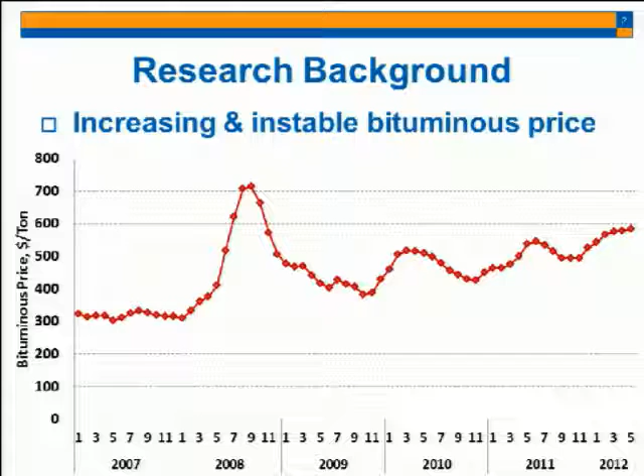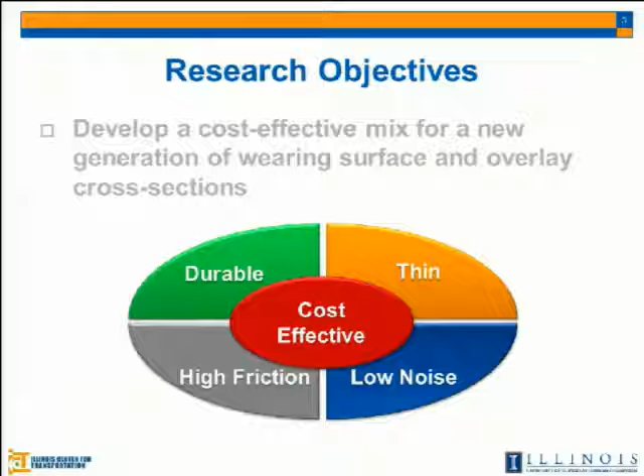For the last several years, or this decade, oil prices have kept increasing, or at least have been unstable. So IDOT developed a cost-effective asphalt mixture for the wearing surface. But even though we developed this kind of cost-effective asphalt mixture, it should still promise similar or better performance than the current mixture used in the wearing surface. So it should be durable, thin, low noise, and high friction. And the most important thing is it should be cost effective.

There are 2 ways to reduce the cost. The first one is to reduce the thickness—in that case, we can save money by reducing the amount of materials. Another one is to replace the materials with less expensive aggregate or asphalt binder. So in this project, we tried to develop 4 new mixtures using these 2 approaches.

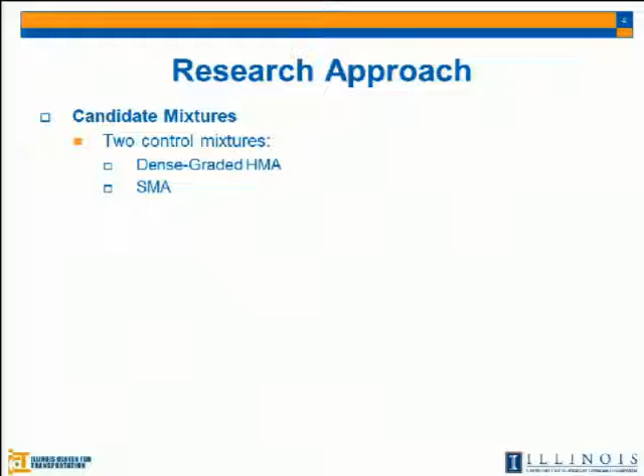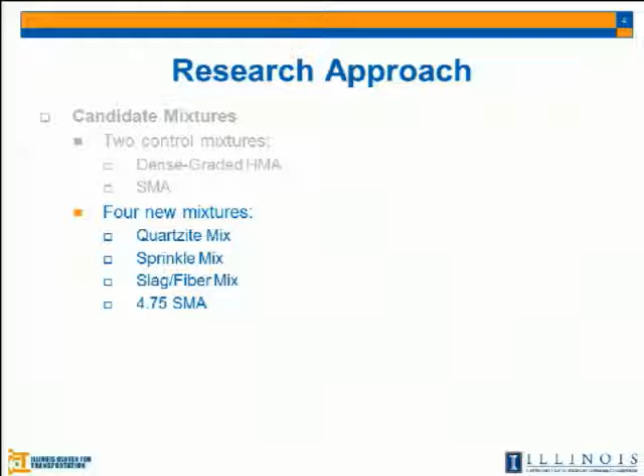To compare with the new mixtures, we selected 2 control mixtures currently used in Illinois as wearing surface mixtures: one is 9.5 dense grade HMA, and the other is 12.5 SMA mixture. In the lab, for cost-effective asphalt materials, we developed 4 new mixtures: the first is quartzite mix, then sprinkle mix, slag fiber mix, and 4.75 SMA. I'll talk more in detail about it later.

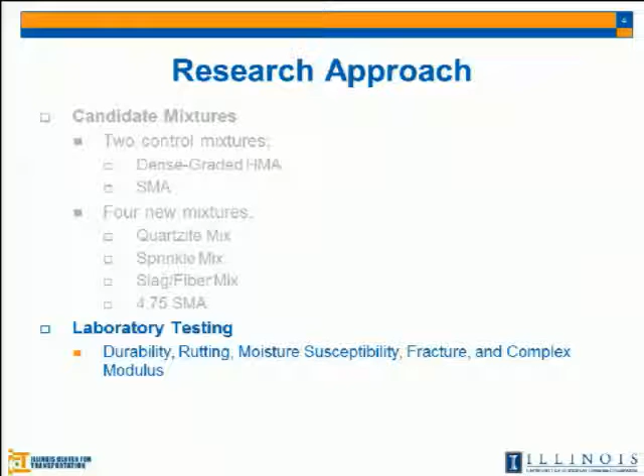So now we have 6 mixtures, including the 2 control mixtures and 4 new mixtures. For these 6 mixtures, we conducted laboratory testing and also field testing, to see the engineering benefit and cost. We did an engineering benefit analysis, or cost analysis, of these mixtures.

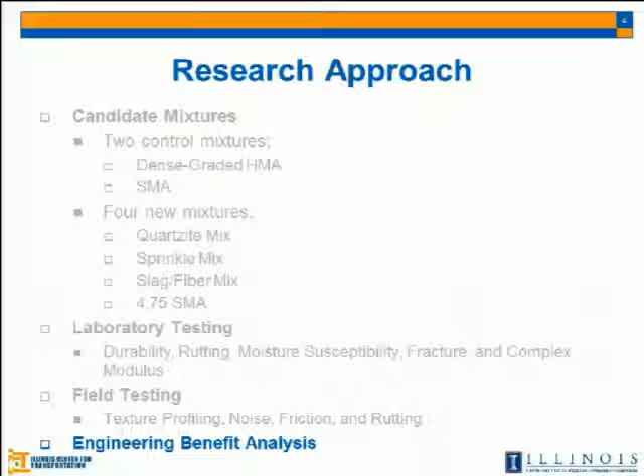Laboratory experimental program: we tried to use locally available aggregate as much as possible, because it saves money—we can reduce transportation fees or costs, and using the most popular aggregate in Illinois is better than importing aggregate from other states. In Illinois, limestone, dolomite, and natural sand are the most popular aggregates. But limestone is not allowed for asphalt surface layers because it's not strong enough to use there.

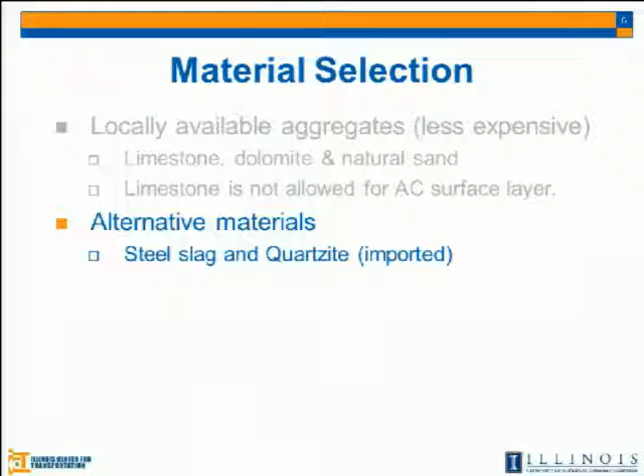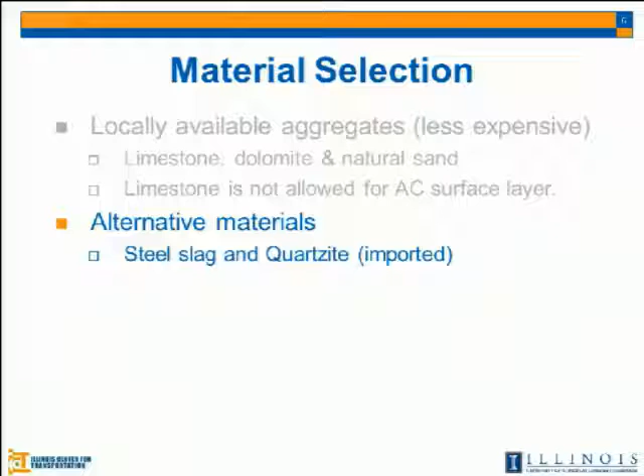To save money on material cost, we try to use dolomite and natural sand as much as possible, but minimize the use of natural sand too. Also, some of the mixtures use steel slag, which is a byproduct of the steel industry. It's relatively cheap, but this steel slag is very strong and has a rough surface. We also use quartzite, which we imported from other states.

The asphalt binder used in this project is PG70-22 and PG76-22 SBS modified binder.

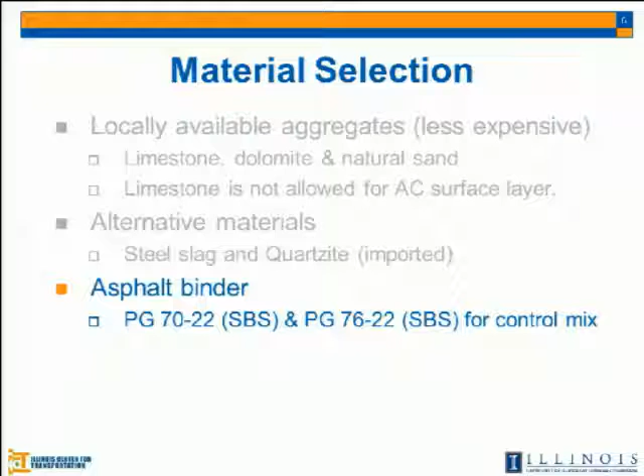To minimize variation from different sources, even with dolomite, if we sample the same dolomite from two different sources, we might have some variation because of the source. So we sampled all the aggregate used in the control mix and new mixtures from one plant, to minimize the variation of the aggregate from different sources.

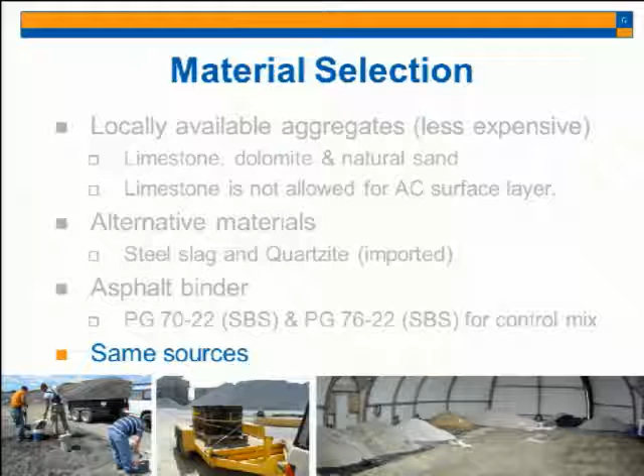Here are the 4 new mixtures. The first one is a fiber slag mix. We use the steel slag for this mixture to reduce material cost, and because of using steel slag, we expect high friction and good resistance to stripping and rutting. Also, by adding fiber to this mixture, we expected higher tensile strength, because the fiber holds the materials together. So when we have reflective cracking or this kind of cracking, the fiber holds the materials. Tensile strength at the bottom of the asphalt layer is always an issue, so if we use fiber, we can reduce the thickness. That was our idea at the beginning.

The second one is 4.75 SMA. I think over the last couple of years, NCAT and some other states developed the 4.75 dense graded mix. If we have a smaller nominal maximum aggregate size, we can reduce the thickness. Usually for dense grade mixture, the minimum required layer thickness is 3 times the nominal maximum aggregate size, and 4 times for SMA mixture. So if we have a smaller nominal maximum aggregate size, we can reduce thickness.

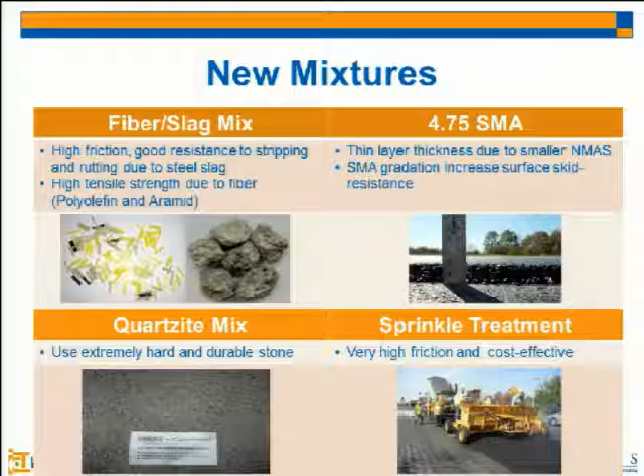For fine dense grade, let me show you one example. Here is fine dense grade - you can see the coarse aggregate is floating in the mixture. But here is the coarse dense graded mixture - you can see the contact of the coarse aggregate. And this is the SMA mixture.

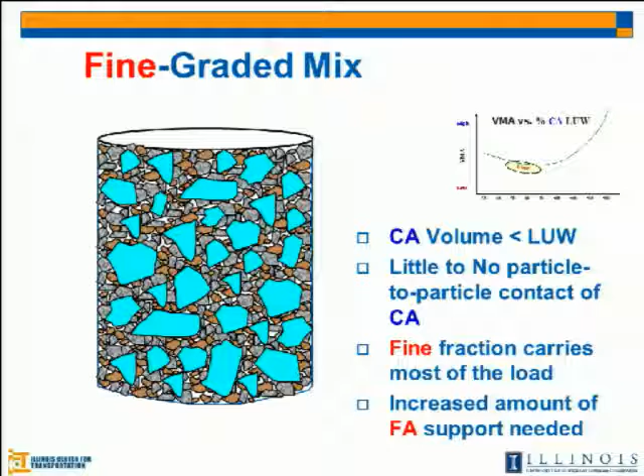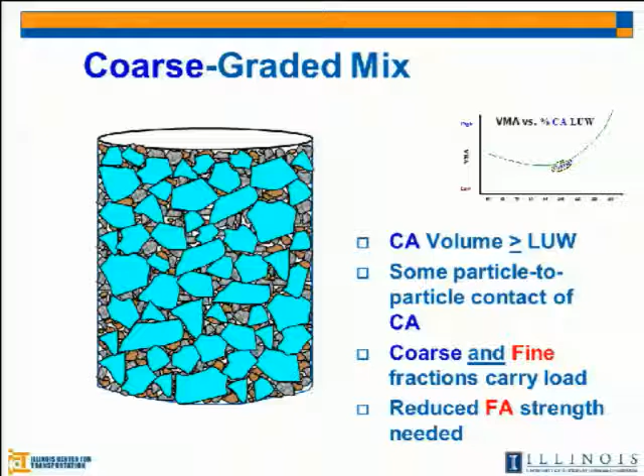The benefit of the fine dense graded mixture is, as people say, the compactability. If you use the fine dense graded mixture at a thinner layer, we can achieve the target density even at a thinner layer. But with the 9.5 control mixture, when I talked with the plant people, they said they cannot compact this mixture to less than 1¼ inch thickness. We had good density, even at 1 inch or less, by using this fine dense graded mix.

To have the compactability and thinner layer, we designed the aggregate gradation to be the fine dense graded by using the Bailey method.

We used the PG70-22 for all of the mixtures except the 12.5 SMA. We cannot control this one because it's commonly used in Illinois, so we just sampled these two materials from the plant.

For 4.75, usually for SMA mixture, we should use more asphalt binder to hold the gap graded aggregate. So the 4.75 SMA had the highest asphalt content here.

Specimen preparation: we had three groups of specimens. The first one is we batch the aggregate, mix in the lab, and compact in the lab using the gyratory compactor. The second one is we sample the loose material from the plant and compact in the lab. The third one is plant mixed and field compacted.

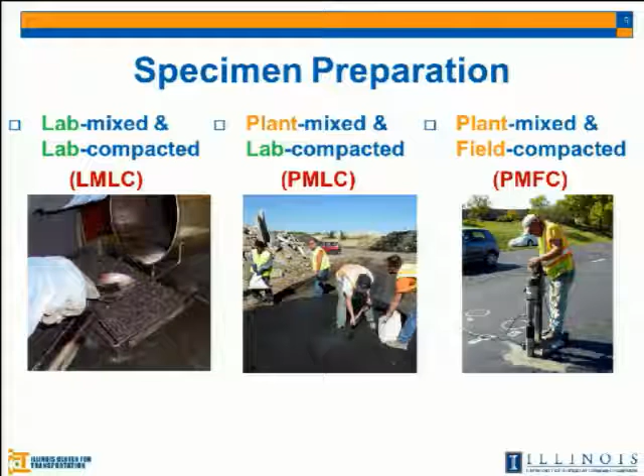This is the plant mixed and then compacted by the roller in the field. We took all three samples and did these 5 performance tests in the lab.

Here is the matrix for lab mixed and lab compacted mix, and plant mixed and lab compacted. We did the 5 performance tests, and also we took cores right after construction and 4 months after construction. But because of the core size, we only conducted the rutting test and fracture test in the lab.

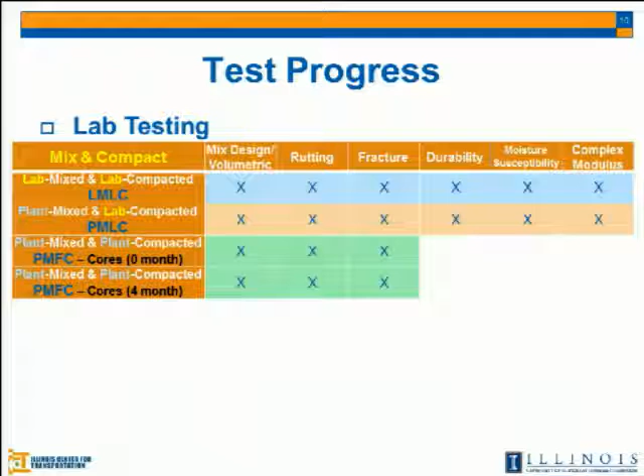We also did full field testing right after construction, and also every 4 months after construction, up to 1 year. That's why we have the 0 month, 4 month, 8 month, and 12 month data. After 1 year, we do this same test every year, so the next field testing for 24 months will be next month.

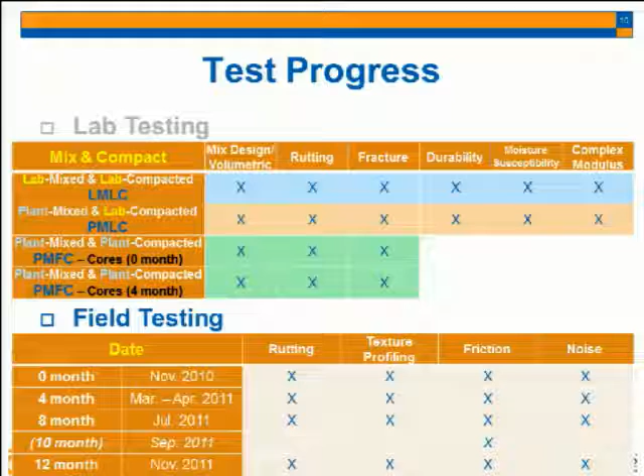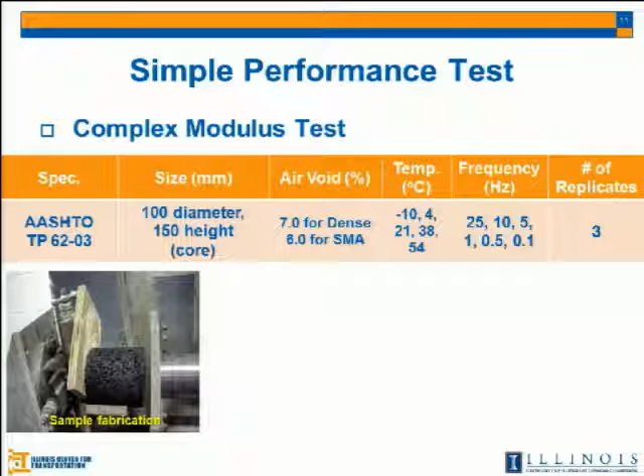So first, the lab test is the simple performance test. According to the AASHTO spec, first we make the gyratory sample, then take a core, and perform the complex modulus test at 5 different temperatures under 6 different frequencies.

For air void, for dense grade mix and SMA mixture, we tried to have the same air void, but based on discussion in the TRP meeting, for dense grade mixture we are targeting 93% density in the field, but for SMA mixture we are targeting 94% density. So if we compact this SMA mixture to have 7% air void, it's not correct in the field. That's why we decided to have 6% air void for all of the SMA mixtures.

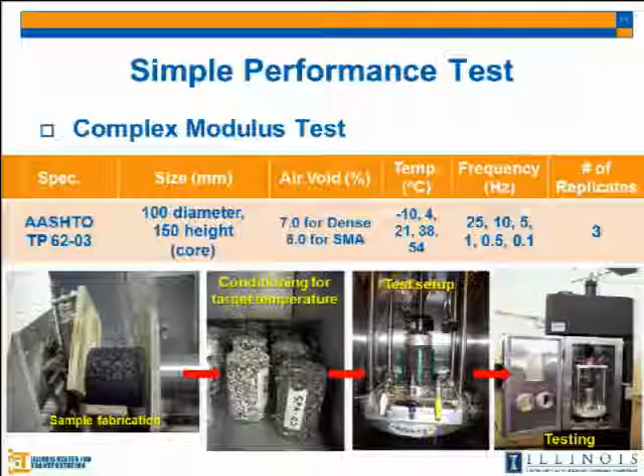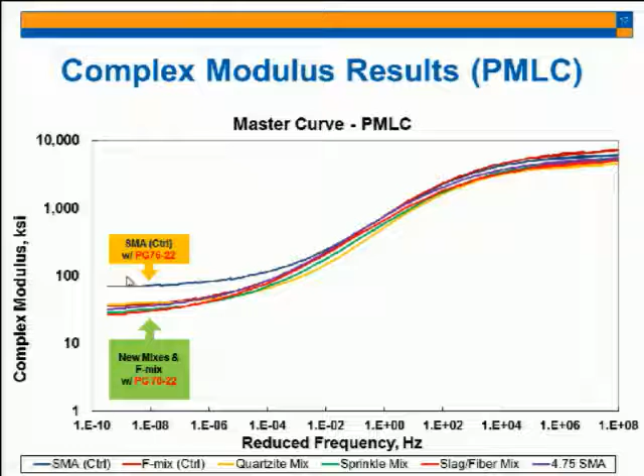As you can see, we only used the PG76-22 for the control SMA. For the other 5 mixtures, we used PG70-22. So you can see the modulus is almost identical in this area, but in the high temperature area you can see the higher modulus in the control SMA mixture.

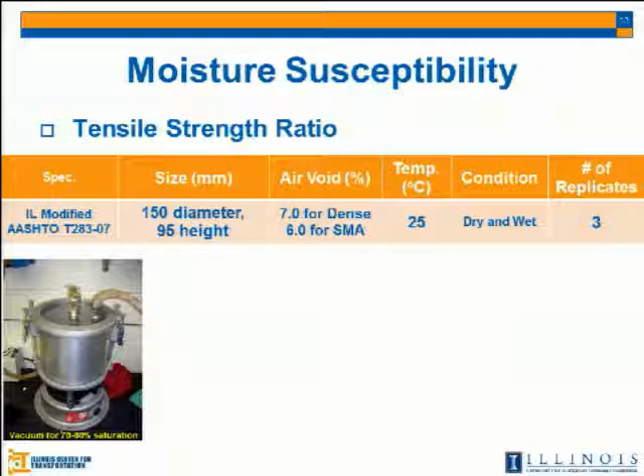The second test is the moisture susceptibility test. We did the TSR test according to the Illinois modified specification. For wet condition, after making the gyratory samples, we saturate them to have 70 to 80% saturation level, then condition them at 60 degrees C for 24 hours.

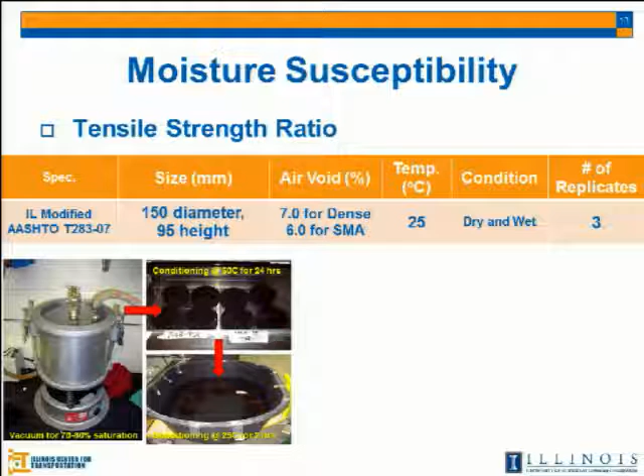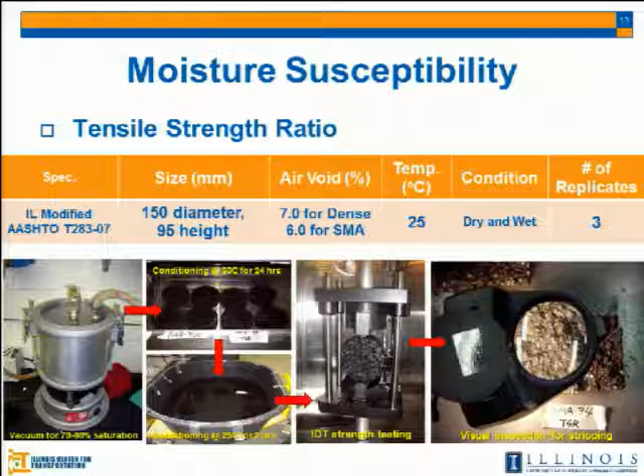After that, we put these samples in a 25 degree C water bath for 2 hours, then conduct the IDT test. For dry condition, we just condition at 25 degrees C for 2 hours. Also, we have lab mixed and plant mixed, but both are compacted in the lab.

As I mentioned before, we didn't make the control mix in the lab—we just sampled from the plant and compacted in the lab. So we only have the control mix for this part, but we can compare the performance between the new mixtures here.

The Illinois TSR threshold requires 85% TSR value and a 60 psi minimum strength. All of our mixtures meet both thresholds.

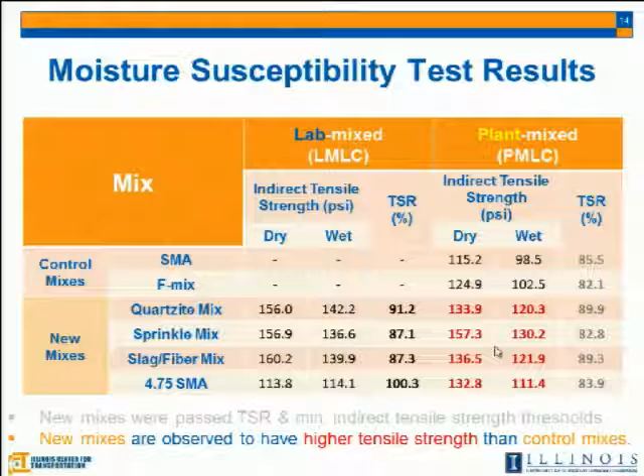The TSR value is from the plant mixed materials. After we sample the materials from the plant, to make a gyratory sample we reheat the materials and then compare. In that case, the property of these materials changes in the mixture. So even though the 82 or the 83.9 didn't satisfy the threshold, this is the reheated materials, so we didn't fully take into account this TSR value from the reheated materials. But to compare the IDT strengths, we use this number to compare our new mixture to the control mixture.

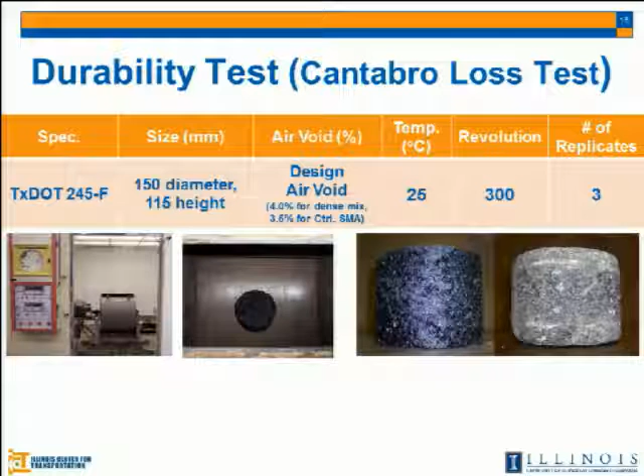The third or fourth test is the durability test. According to Texas DOT specification, first we made the gyratory samples to have 115 height and design air void. We measured the weight of this gyratory specimen, then put it in the LA abrasion machine without steel ball, rotated it 300 times, took it out, and measured the weight of the specimen again to calculate the loss of materials.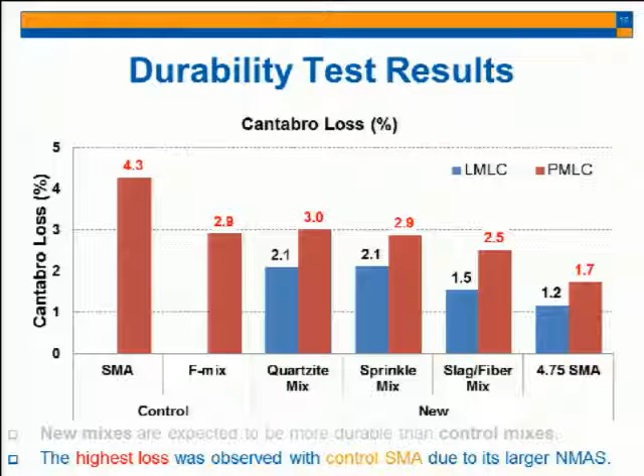Next is the rutting test. Using the Hamburg wheel tracking tester, we made a specimen and did the test at 50 degrees C water bath, applied 20,000 passes, and measured the maximum displacement of the surface.

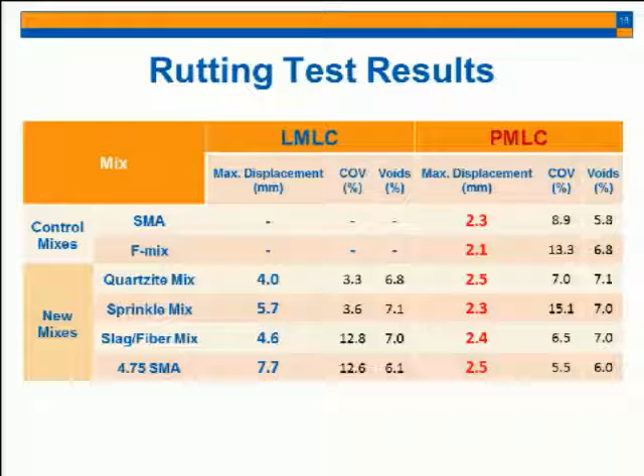For the lab prepared specimen, the 4.75 SMA showed higher rut depth because of its 7.3% asphalt content compared to the others with around 6% asphalt content. But for the plant mixed and lab compacted mix, we have almost identical rut depth after 20,000 passes of the steel wheel for all of the mixtures.

The rutting performance is very sensitive to air void, so we measured the air void of these cores before doing the rutting test. The right wheel always shows higher air void because when we place the materials in the field and compact, the right side is unconfined. So when applying the same number of passes, the right side of the lane always had higher air void.

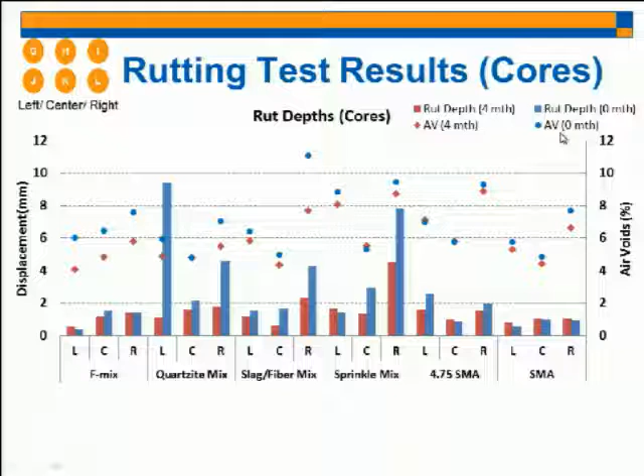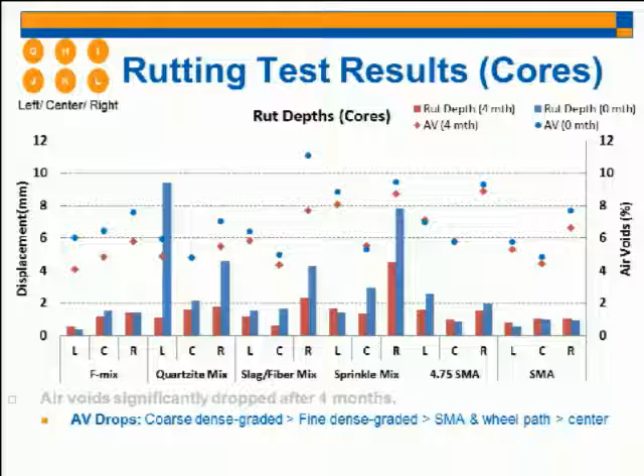We also took cores after 4 months of construction. After 4 months, the air void significantly dropped, and the coarse dense grade showed a higher air void drop than the fine dense grade and SMA mixture. Also, the air void in the wheel path dropped more than in the center of the lane.

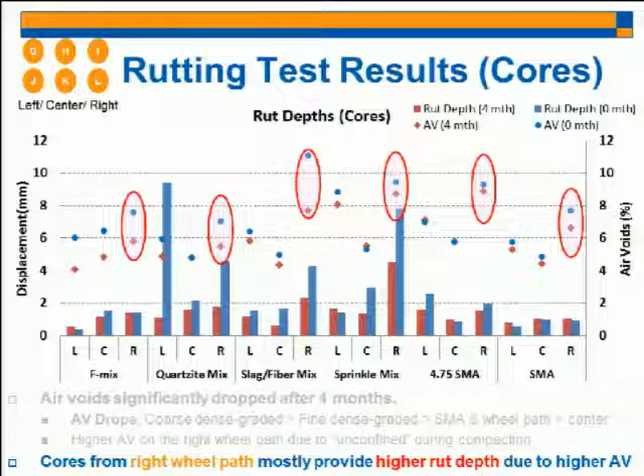Because of the higher air void on the right wheel path, the rut depth was higher than the center and left wheel paths.

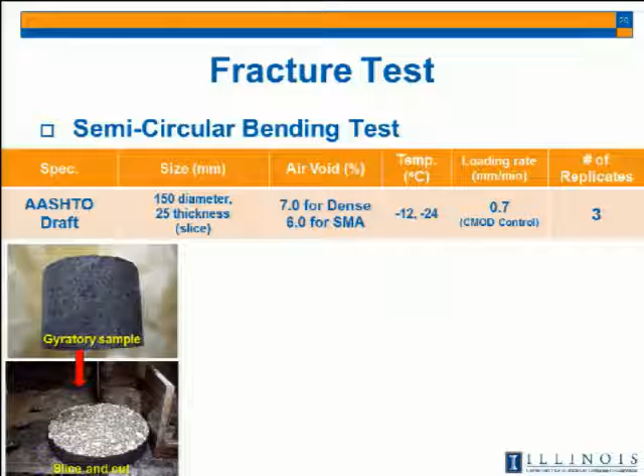The other test is the fracture test. We use the semicircular bending test. After making a gyratory sample, we sliced it, cut it in half, made a notch, and measured the ligament area to calculate the fracture energy. We did this test at two temperatures, -12 and -24.

Significantly, the control SMA mixture provided the highest fracture energy, but the sprinkle mix was the lowest because we just used regular or cheap materials for the sprinkle mix, spreading the sprinkle chip like a chocolate chip cookie. The 4.75 SMA mixture showed higher fracture resistance among the new mixtures due to its higher asphalt content.

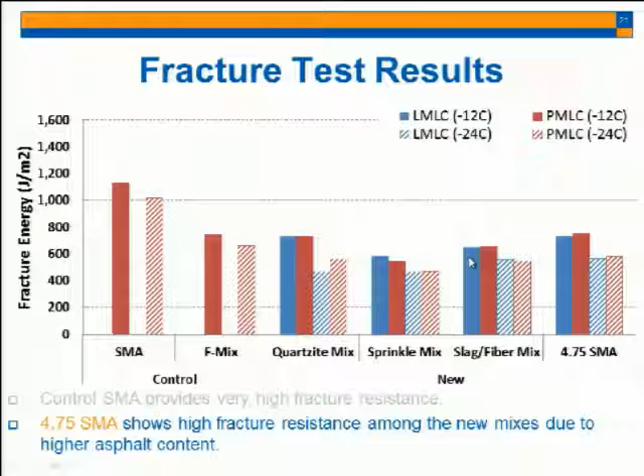As I mentioned before, we were expecting the slag fiber mixture to have higher fracture energy because the fiber holds the materials together during the fracture test. But it still looks relatively lower than the 4.75 SMA.

We noticed this fiber slag mixture has a very high COV of the fracture test result. So we took a look at the fractured face of the surface. Some specimens showed the fiber along the crack propagation area, but some did not. So fracture energy for this mixture is depending on whether fiber is located in the crack propagation area or not.

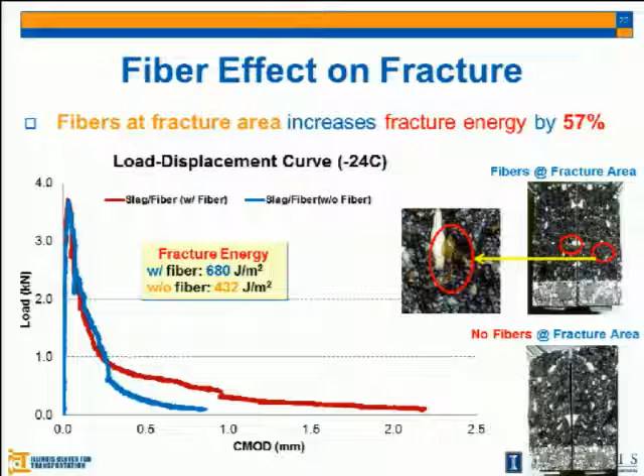We add the fiber in this mixture at around 0.05% by weight of asphalt mixture. That's by weight, not volume. So in the plant, when they produce 1 ton of material, they put in 1 pack of fiber, and 1 pack has 1 pound of fiber, which is 0.05% of the fiber. This is recommended by the company. So we used the same percent or same amount of fiber in the mixture.

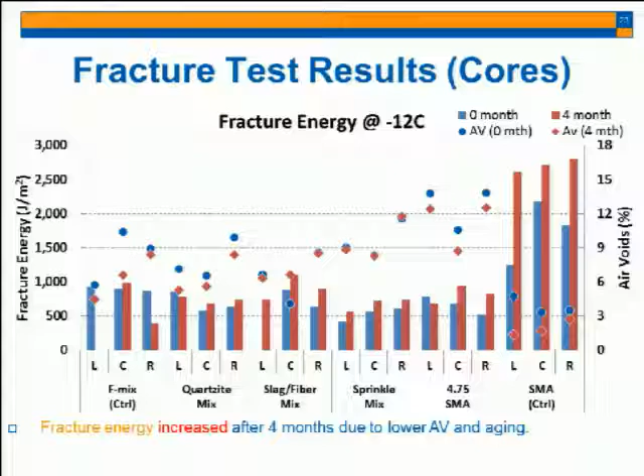For fracture tests, we did the core. We did the fracture test for field cores, and after 4 months, the fracture energy actually increased because the density also increased, and there might also be an aging effect during those 4 months.

Yeah, I think I need to speed up a little bit more.

We placed this mixture at the field site close to Schaumburg in Chicago. First, we put the F mix in 4 sections with 2 different thicknesses to see the thickness effect on performance. We also put 2 sections with the same thickness and same material to see the traffic effect, since even assuming the same traffic there might be some difference between directions. That's why we put the same material at the same thickness in 2 different directions.

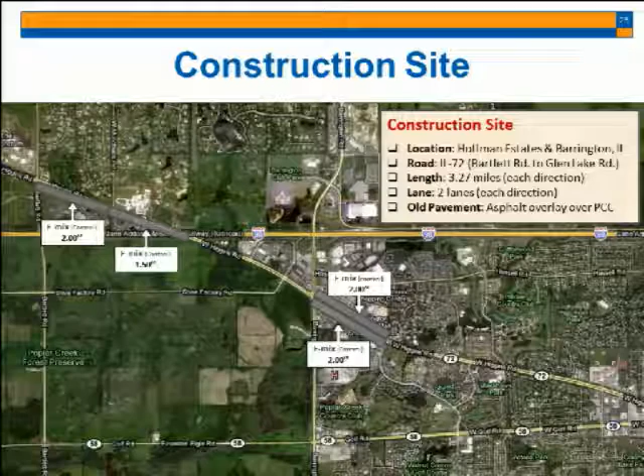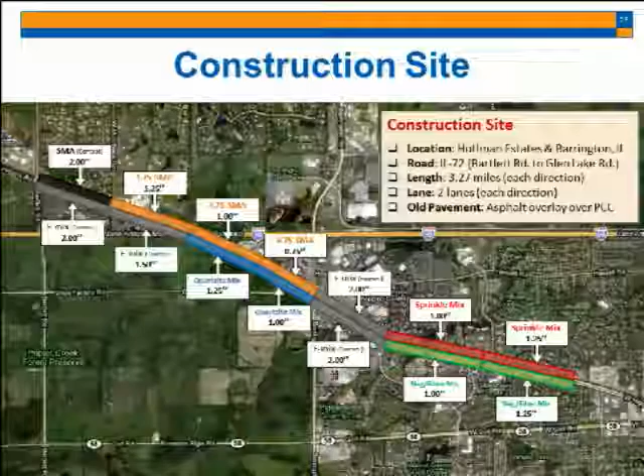For our new mixture, we placed the materials at 2 different thicknesses: one 1 inch, another 1¼ inch. We tried to place the F mix at 1¼ inch too, but it didn't work, as I mentioned, due to compactability issues. So for the 4.75 and 12.5 control mix, it could not even make 1½ inch of thickness. So 2 inch was the minimum thickness they could make.

So we had 2 inches of thickness for the surface layer. But if we place 2 inches of wearing surface, we don't have a leveling course. If we have a 1 inch wearing surface, we place 1 inch of leveling binder, so the total is still 2 inches. Leveling binder is a cheaper material, so if we reduce the wearing surface thickness, the cost will be cheaper than the other section.

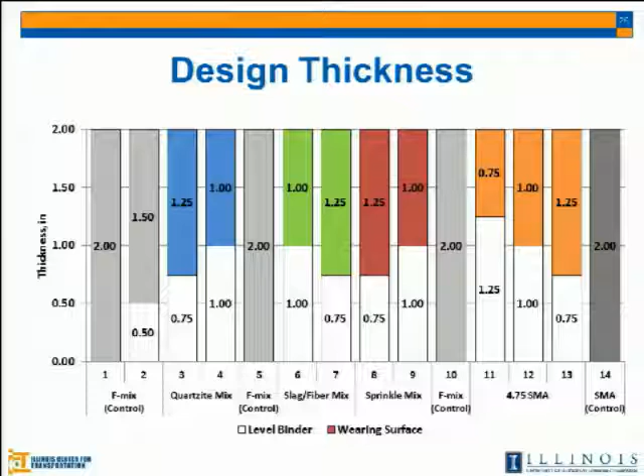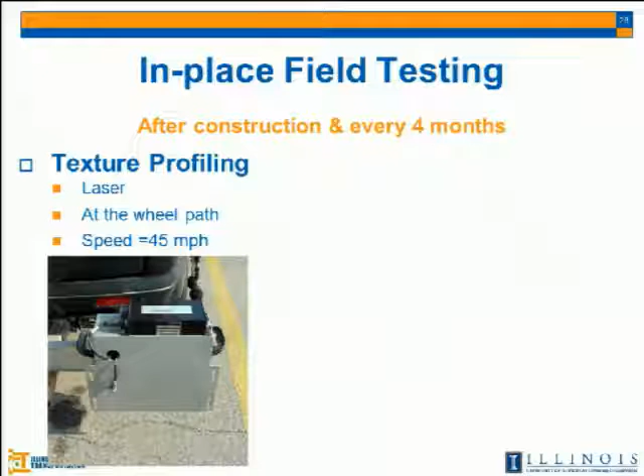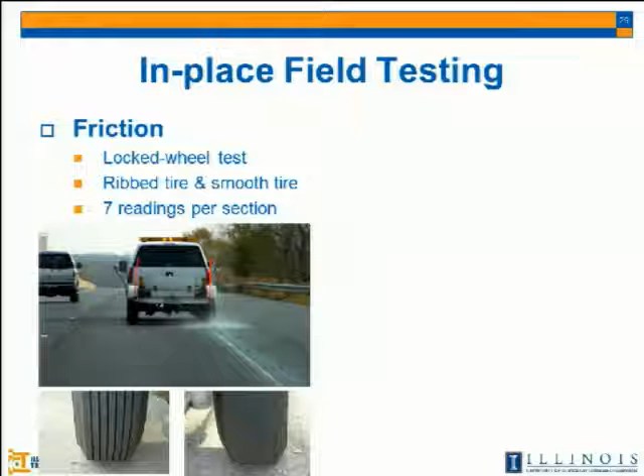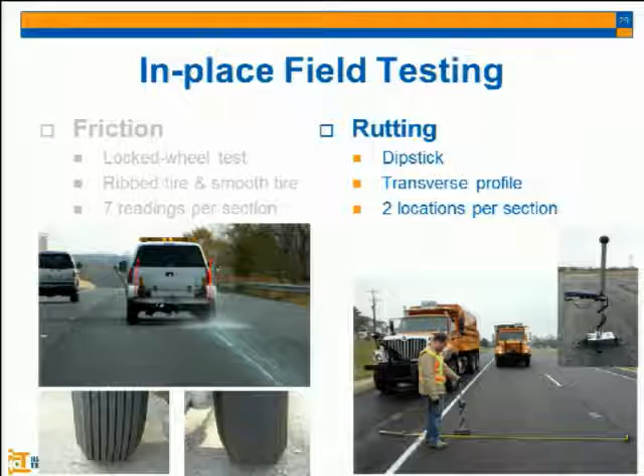We did 4 types of field testing: for friction, noise, rutting, and texture profiling using laser at a speed of 45 miles per hour, after construction and every 4 months afterward. We did the noise test using a microphone close to the tire to detect the sound intensity factor between the tire and pavement surface. We also did the friction test using a locked wheel friction test device with 2 different tires, a ribbed tire and a smooth tire, and we did measurements in the field under traffic control using a dipstick.

Mean texture depth: the mean texture depth of the SMA mixture decreased more than the dense grade mixture over time. Right after construction, the 4.75 SMA and usually SMA mixtures provide higher mean texture depth than other dense grade mixtures, but the texture depth decreased more than the dense grade mixture over time.

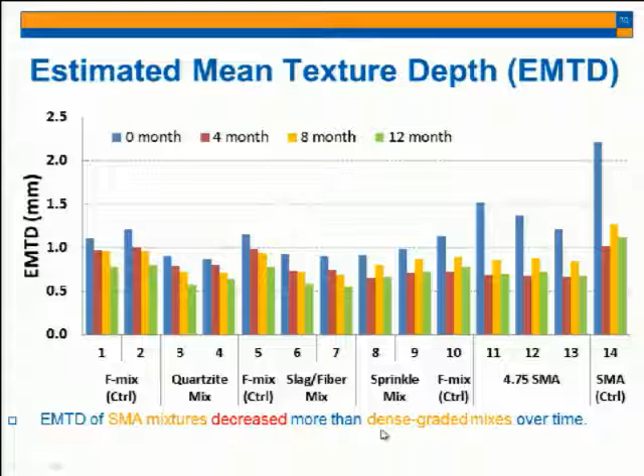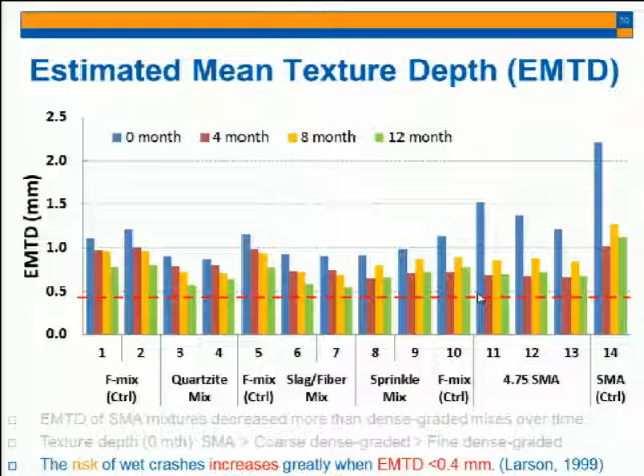There is some recommendation for this mean texture depth. If the mean texture depth is less than 0.4 millimeters, there's a higher risk of wet crashes. All of our sections were above the 0.4 millimeter mean texture depth.

Friction number: we had a relatively higher friction number in the sprinkle mix right after construction, because of the chocolate chips on the cookie effect. But after several months it dropped, because we saw some pop-out of the sprinkle chips in that section, or some materials on the surface were rearranged under traffic. So this might be one of the reasons.

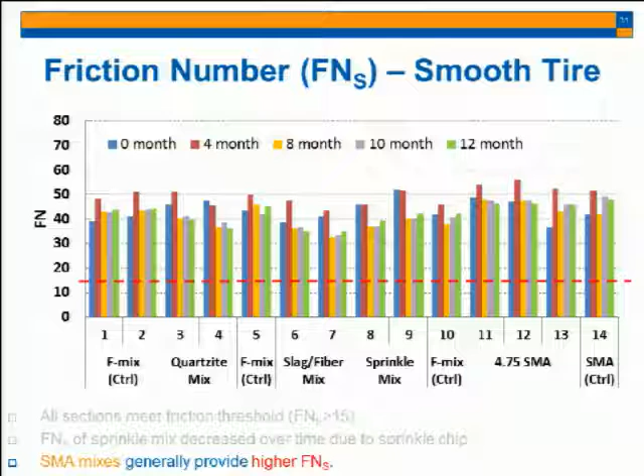So SMA mixture generally provides a higher friction number and sound intensity level.

If the surface is too smooth or too rough, this causes a higher noise level. If we have the proper texture or surface void, the noise is reflected into the void and diminished. But if it's too smooth, the noise goes into the air on the other area. So if the surface is too rough, it creates some noise between the tire and pavement.

So as you can see here, this is largely dependent on the aggregate size. The 4.75 SMA mixture provides very low sound intensity level, while the 12.5 SMA mixture provides the highest sound intensity level. Usually a 3 decibel difference makes double the sound intensity level.

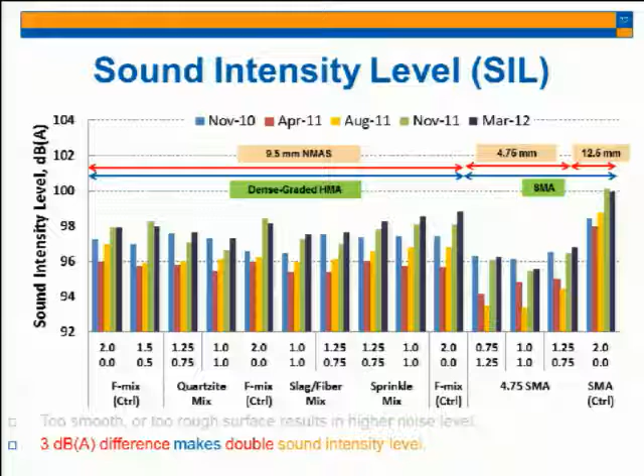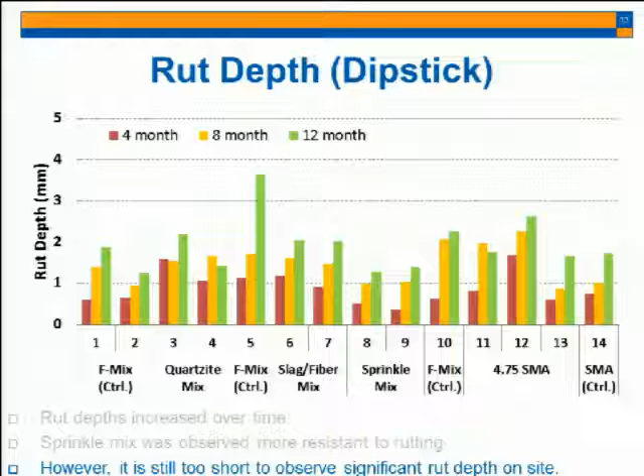So, rut depth. Actually, for this rut depth, 1 year is still too short to observe significant rut depth in the field. So we will need to see more data.

So this is the last section. We have the performance data from 5 different testing methods. But to find which one is the most cost-effective material, we did the engineering benefit analysis.

This is the cost information from the plant. This column is mixture cost, and the next one is construction cost. We combine these two to get the total cost, which is the agency's cost.

You can see the control SMA provides the highest mix cost because it used the PG76-22 highly modified binder. Also the 4.75 SMA mixture, to have the small aggregate size, we screen the aggregate from the stockpile to get the 4.75 SMA. This additional process costs a lot actually, so that's why we have a very high mix cost here. Also, the 4.75 SMA contains 7.3% asphalt binder.

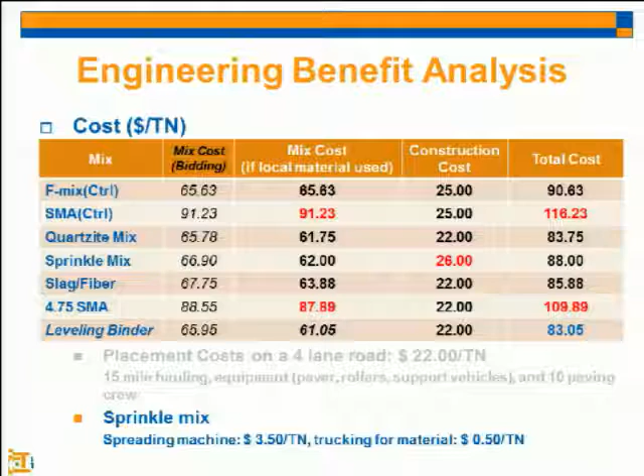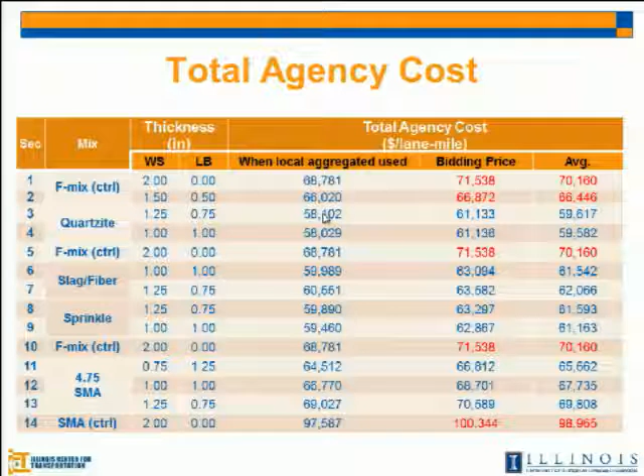And also for the sprinkle mix, we should have the spreader, so it increased the construction cost too. So this is material cost, but for each section with different materials and different thickness, we calculate the material cost here. This column is the bidding price before they do the construction. But after they finish construction, we get another price, which is what they really spent on the aggregate or the asphalt binder.

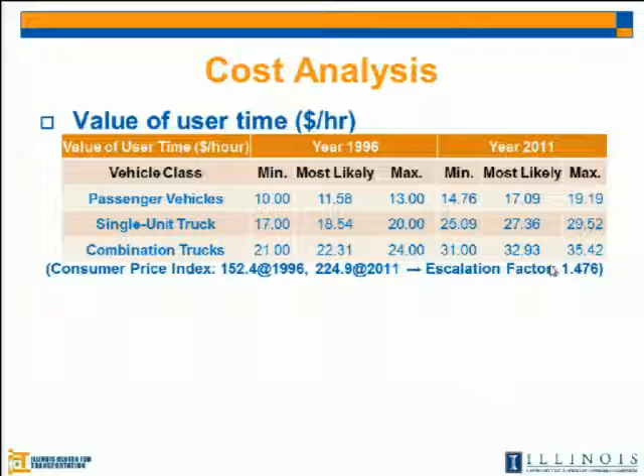To do the cost analysis, we should have the user cost. To calculate the user cost, this is the cost per hour for driver and the road user, from the consumer price index. We have this number, but to convert it to the 2011 year, we use the escalation factor. We also have all the traffic data for each section.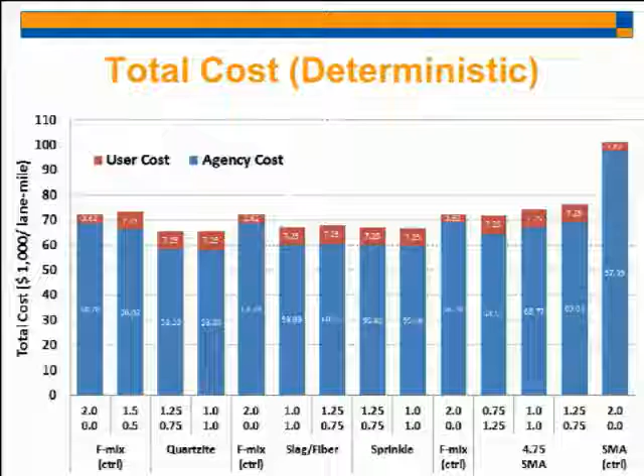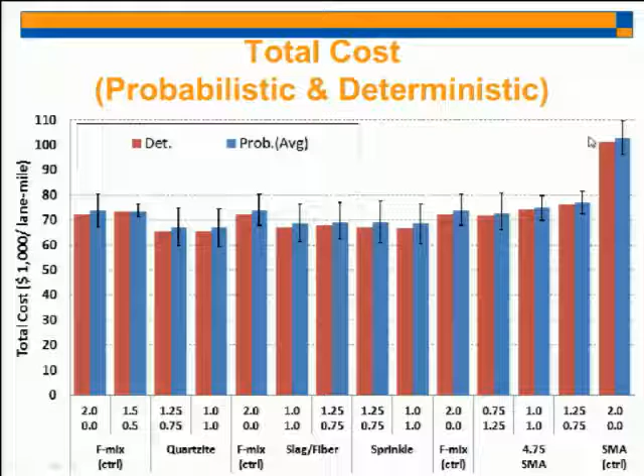This is deterministic cost analysis, where we just fix all the numbers and then calculate the total cost. But this second one, the blue one, is a probabilistic cost analysis, where we allow all the variation of the material cost and user cost too. As you can see, the 12.5 SMA section provides the highest total cost.

Now we have the cost and the performance. But to quantify the performance for each test, we use Fisher's LSD statistical method. By using this method, we can rank the mixtures for each performance, A to E or something like that. We put all the raw data into the software and get the rank A to E or B, C. With A and B here, there is a significant difference in the performance.

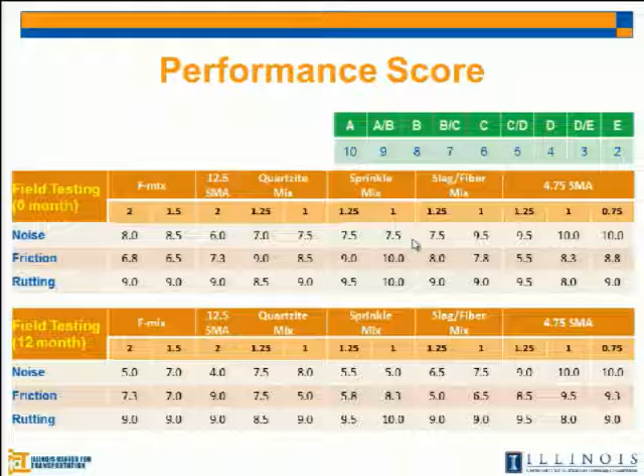So we did the same things for the field testing result. After that, we assigned a specific number or score for each group. For example, for A we assigned 10, and for E we assigned 2. Then we convert all the A to E letters to scores, and sum all of these scores using this method, because we have both the lab test result and the field test result.

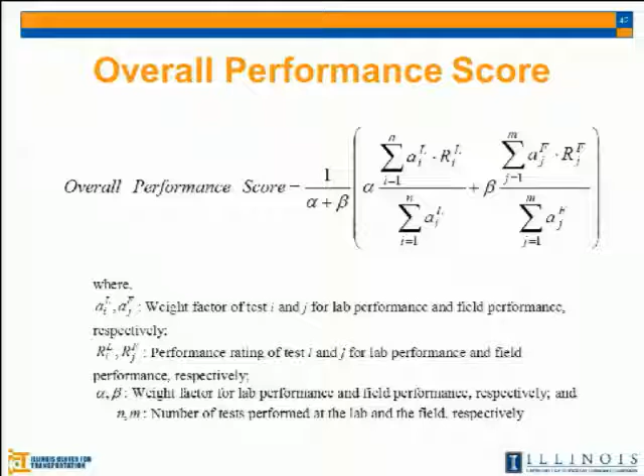For rutting, we did the lab test and field test too. So we combined them, but we have a weight factor for each, based on the performance result we want to give more weight to. If people trust the field testing result more, we're going to give it more impact factor. We also have many different performances. For example, in Arizona and Texas, they give more weight to the rutting performance than fracture. But in colder areas, we give more weight to the fracture test result than rutting. We're still working on this part, but here I assume we give all one number for each.

So I convert and get all the scores for each performance, and then sum or take the average. This gives the overall performance score. Then this is the cost for each section. Dividing this cost by the overall performance score, we can get the unit cost for each section.

Usually the control mixture provides a higher unit cost for one performance score, while the new mixture provides less cost for one unit performance. So the sprinkle mix with 1 inch thickness of the wearing surface provides the most cost effective section.

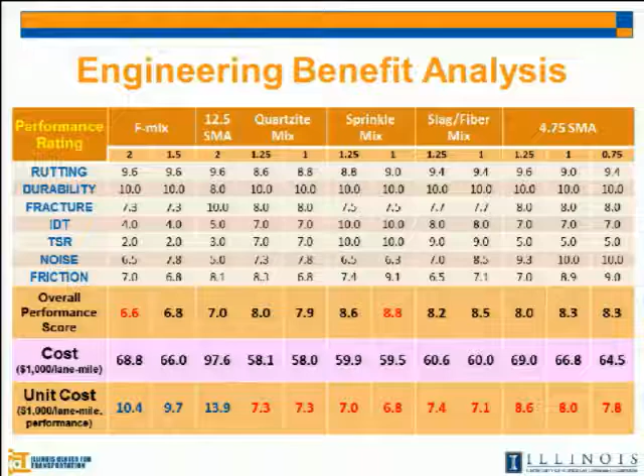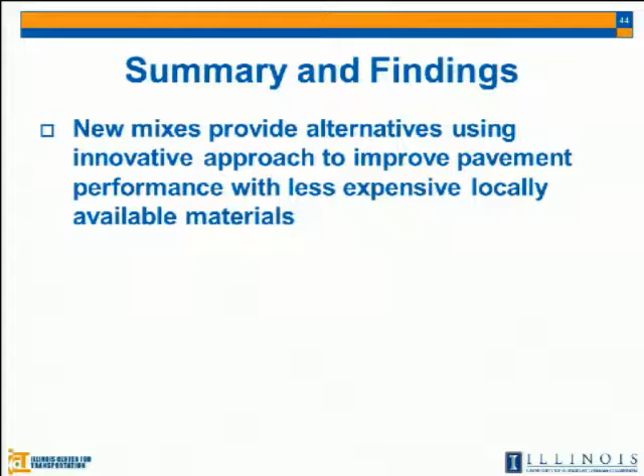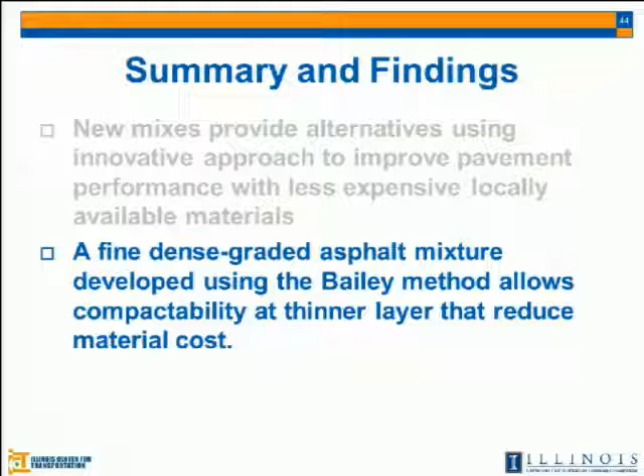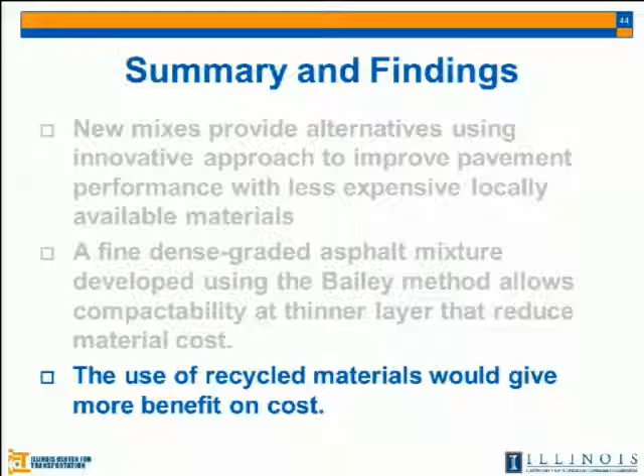The new mixture provides alternatives using an innovative approach to improve pavement performance with less expensive, locally available materials. Using a fine dense grade aggregate gradation, we could get good density on a thinner layer. The use of recycled materials would give more benefit on cost. For the control mixture, they use recycled RAP materials inside, but in our new mixture we didn't use any of the RAP materials. We still use the steel slag, but not the RAP. If you use the RAP materials in our new mixture, we could save more money. So that's it, thank you.

Any questions and comments?

If those fibers were chosen by you or someone else for the mix, it seemed like they weren't that effective. Oh, I did. Yeah, but who recommended the fibers? It didn't seem to give the performance they were supposed to.

Actually, at the beginning we had more than 20 tentative mixtures, but we did some literature review. We noticed there were some states or schools that tried to use fiber or something like that, so we put this mixture in our table to determine it. Actually, the fiber mixture and the steel slag mixture are two different mixtures, but in the TRP meeting we combined these two because when we use fiber, the cost increases, but using steel slag can lower the cost. That's why we combined steel slag and fiber.

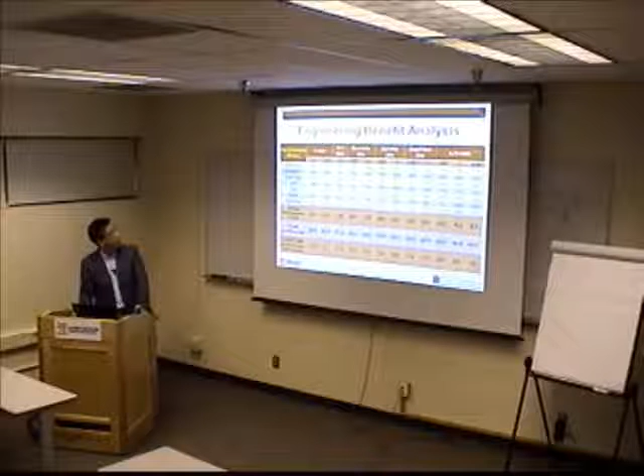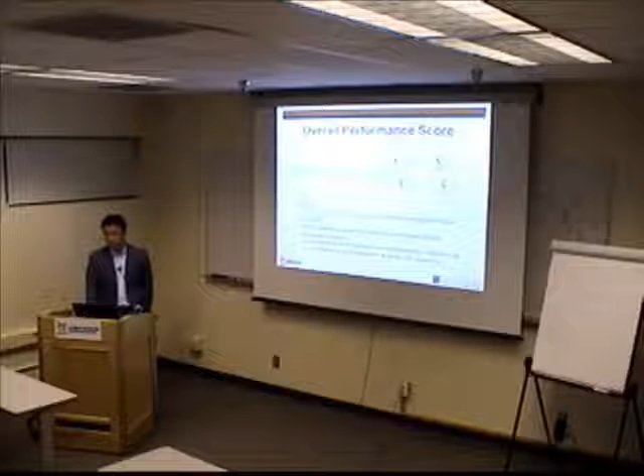Yes, I'll show you here. Some mixtures have A, B, something like that. So for A, we assign the 10 points. Does A mean it's the best? Best. Okay. So for durability, we only use the Cantabro loss test for durability. If this mixture has the A rank for the Cantabro loss test, it will have the 10.

But she's talking about the TSR. TSR. We also did this LSD, Fisher's LSD analysis. So if this mixture has the A for that, from that analysis, it will have the 10.

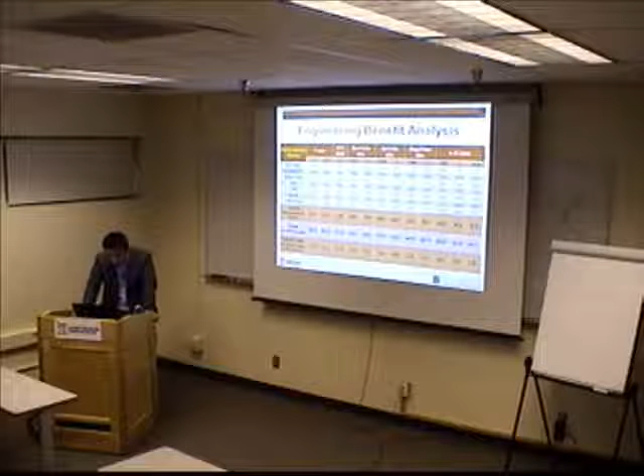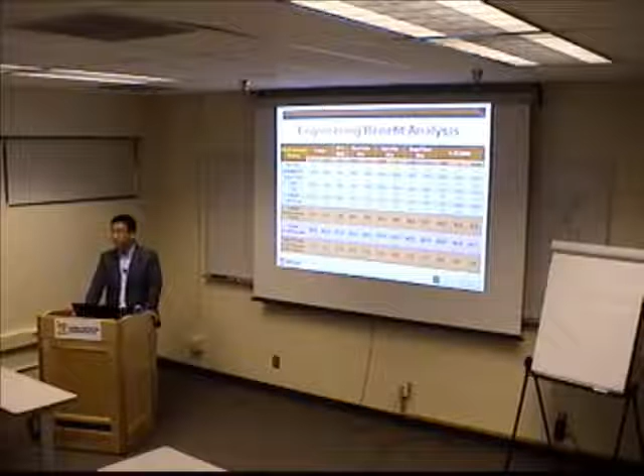If you want to go back to the TSR page - it's my mistake, I assigned the lower value for the highest one, I think. Because 4.75 SMA provided 100% of the TSR. Yeah, it was more than 100. Yeah, more than 100, 1 point something like that. So I think that - thank you for that.